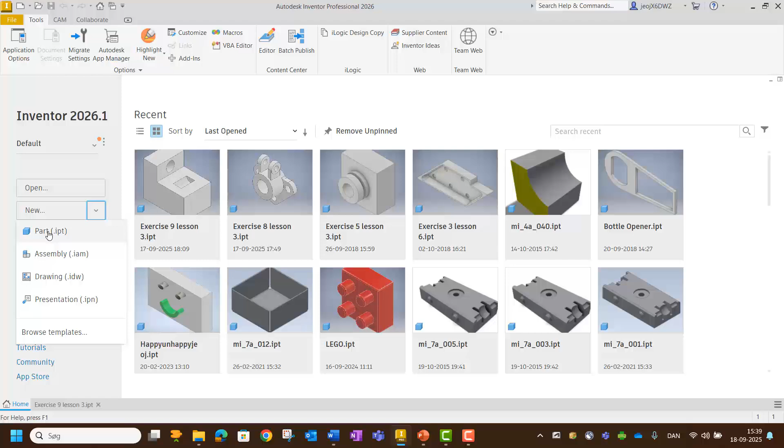So let's have a look. I'll start a new part. It's already done here, but I think I'll do it from scratch here, showing up with my empty paper.

I think we have a 0 point here, and I think I will have my 0 point here. So I basically start from here. Yes, let's have a look.

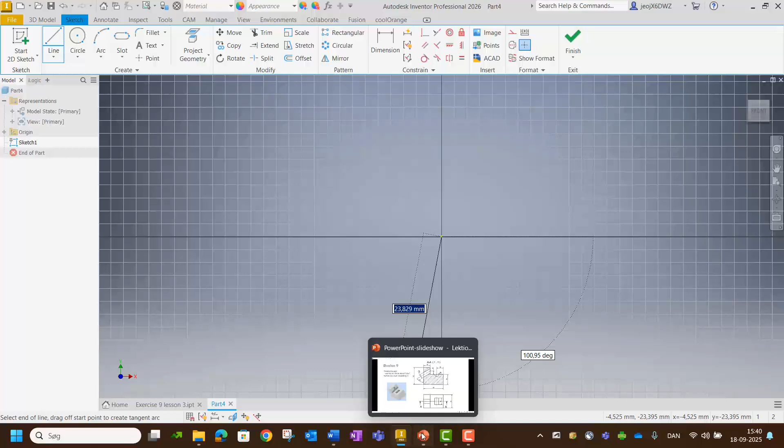I'll simply do it with lines up here, and this one was - I tend to forget - but 50 and 20. So I'll simply do this 50, I'll write it straight away, and then carry on here. And this was 20.

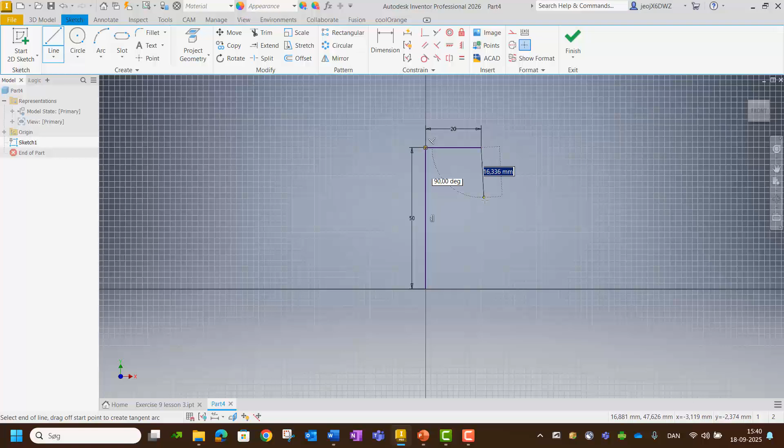Yes, and then carry on with the last part of it, this last geometry here.

Of course, we need a couple of dimensions, and I will have a look again: 30 here, the cutout, and 60 long. So let's add them.

60 here, and this was 30. When you add dimensions like that, be careful not to choose points if it's not needed and necessary.

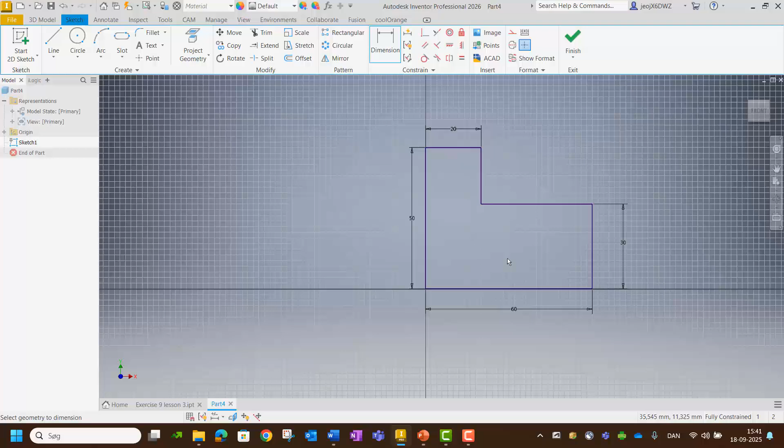But here we go. It's the first sketch for the basic feature here, and I guess this should be okay.

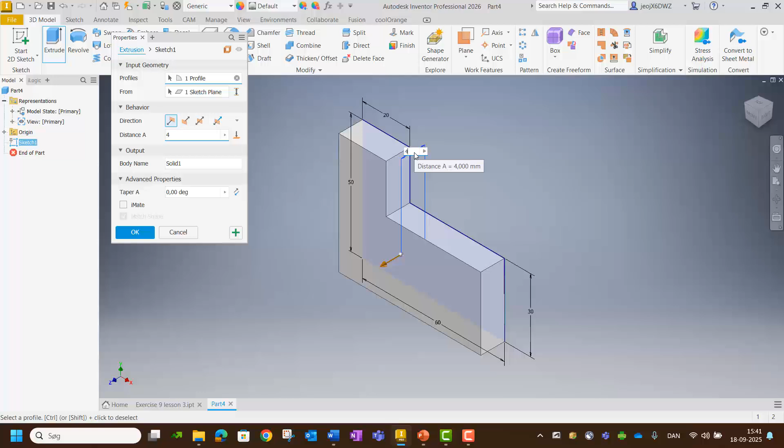So I'll finish my sketch, make an extrusion, and again I will go back. It was 40 wide, so I'll simply write 40. It's blue here, so I can write it straight away.

Here we have some symmetry. I guess we have the cutout here, and we have a hole later added. So I think I'll use the symmetry option here for my basic feature. So here we go.

First part, or first feature. So next thing I guess I'll do is the small cutout here, exactly symmetric about the center, and 20 wide, and R6 in radius. So I hope that should be straightforward.

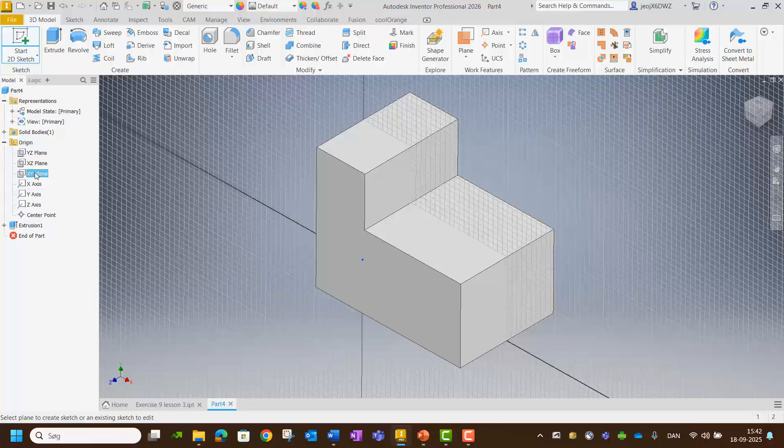So I'll simply start a new sketch, and I guess the easiest thing here to do is sketching it on the center plane here. X, Y, move in to the center of it. Yeah, exactly in the center.

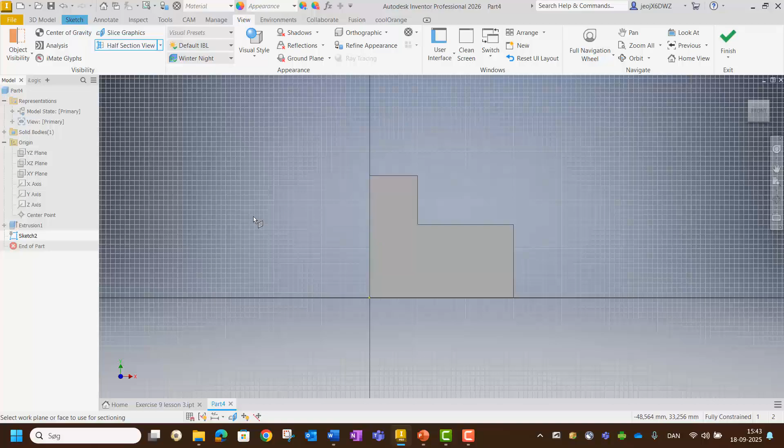Then we have a trick here. I will basically now make a half section here. It can be done by choosing this XY plane, or I can simply press F7. So I can find it here somewhere. Yeah, it's F7, and then it's actually sectioned it here, like that.

So I can see what I'm doing. Okay, back to the sketch. I will simply make a circle here, and I'll leave it the center on the top because it's a half circle, and it should be.

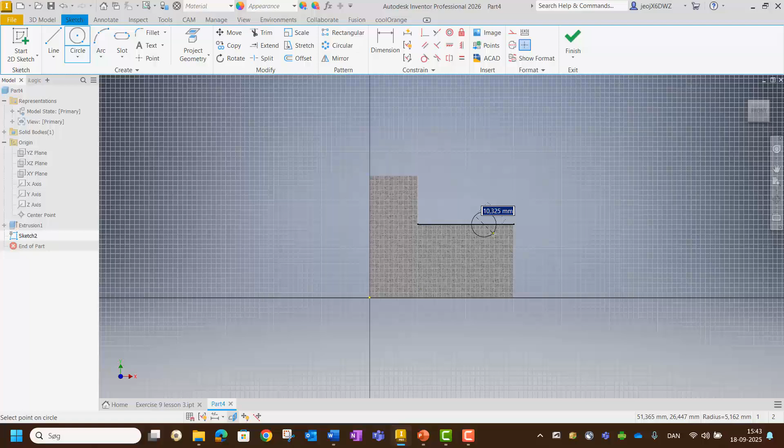12. I can actually leave it without, just to show you what to do. I'll leave it without the dimension here. Of course, when you add the dimension here, that'll be needed. I need the diameter of it here.

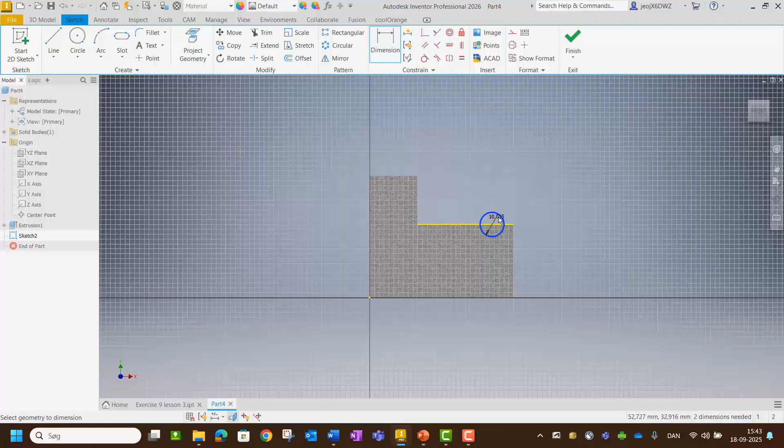And then I can actually here now choose to make it as a radius, because it's a half circle. So I can change it to a radius. Doesn't really matter, but a basic rule we can say is that...

I'll move it in here. It's flying out here, so I can for now move it. It hasn't constrained it. But the basic rule is when you're having something open, an arc or something, then we normally use radius.

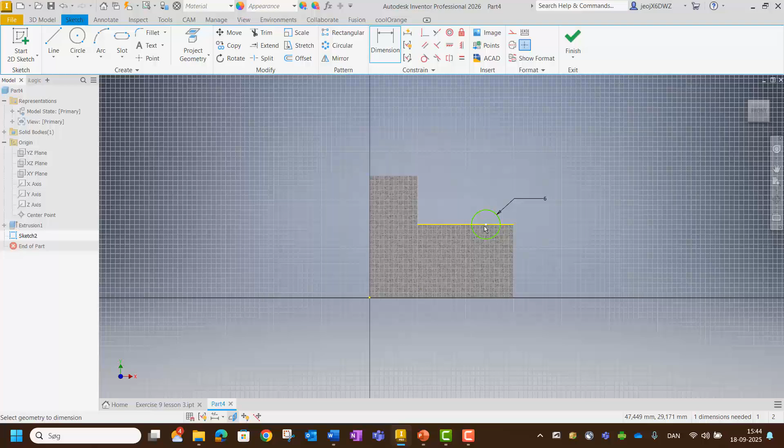When it's a closed circle, then it's normally a diameter symbol we are using. It is actually a cylinder, a closed circle here, but since it is halved here, then I've chosen to dimension as a radius. Not important, really. We have a distance here of 20, from the center to this edge.

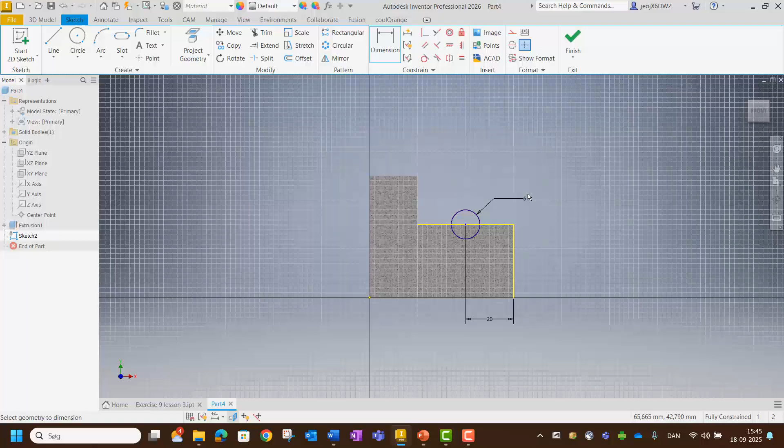Notice this edge here is now turning yellow, same as this one up here. It's because it's automatically projecting from existing geometry to our sketch. But it's fully constrained.

Exactly in the center. And then I can do an extrusion. And here I want to cut like that, to both sides, the symmetry one, yeah. And then I'll choose what to cut.

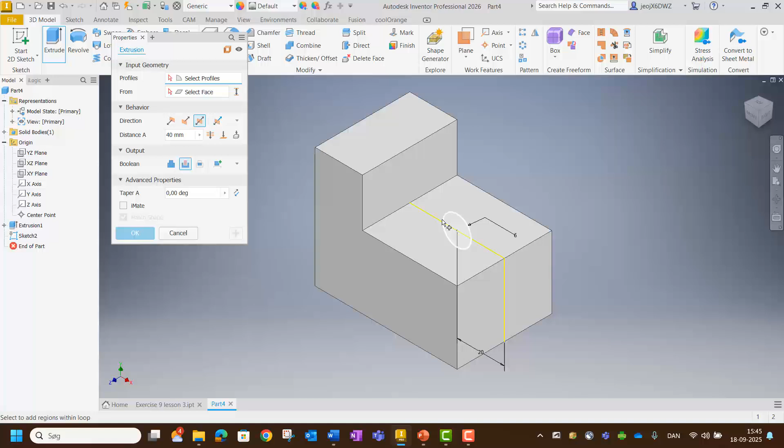Here you can see I can actually choose half of it or the other half or both. I can pick twice. If I click on the edge, then I actually click all of the circle like that. It's a cut function, but it's not 40 here, it is actually 20. Something like that. Okay, here we go.

Two features so far. So the next one is slightly more complicated. You can see because we need a hole here at a distance of 10, center of a distance from 10 from this edge here. That can be done in, I guess, several ways.

The way I've been doing it is actually creating a plane here. Then I have a line. I can turn a new plane around. That's what I have chosen. So let's see if I can actually do it.

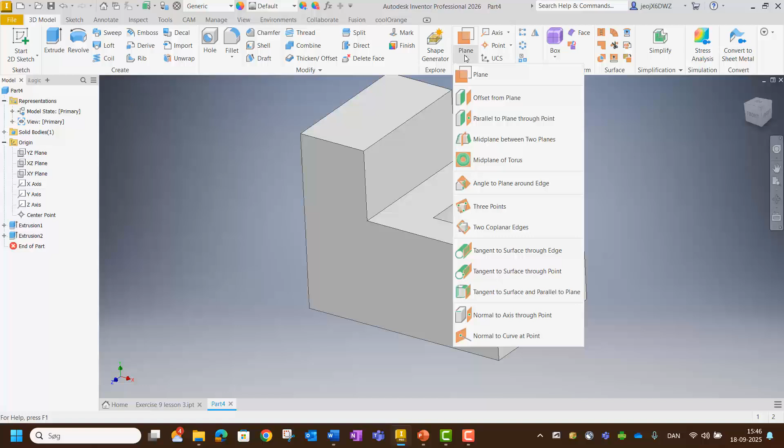So I move into the work plane, offset from plane from this one, and here we have the thin, and we have a nice work plane here. Edit. Then I want an axis.

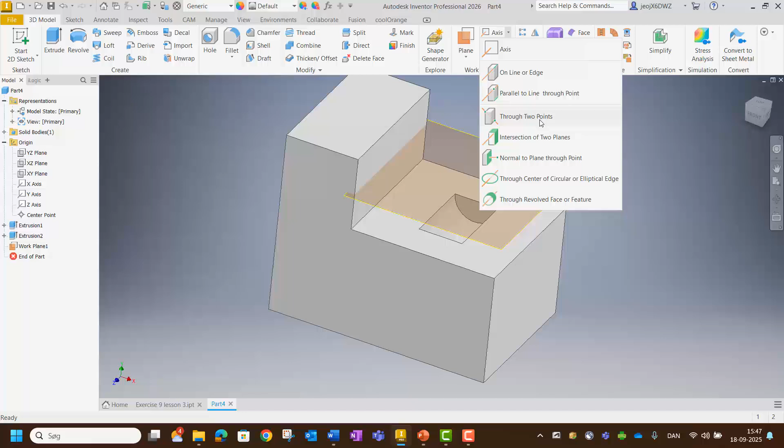I can actually create another plane around. I'm looking at using angle to plane around an edge. To get an edge, I will create this axis through not 2 points, but intersection of 2 planes here could make sense.

So let's try that one. So the plane I just created, and then this surface here. Then we have an axis.

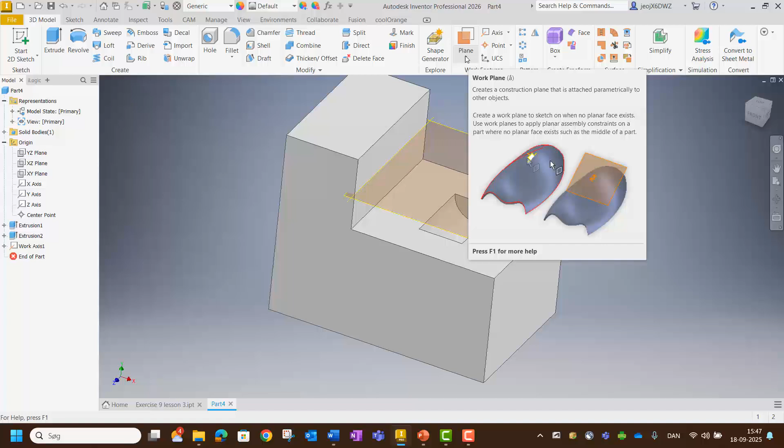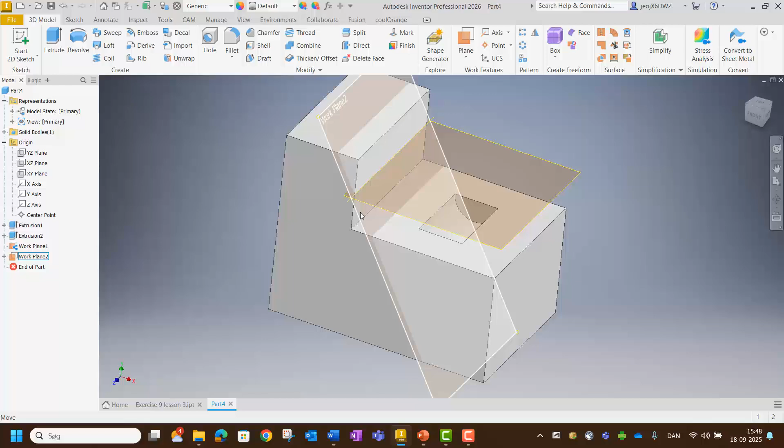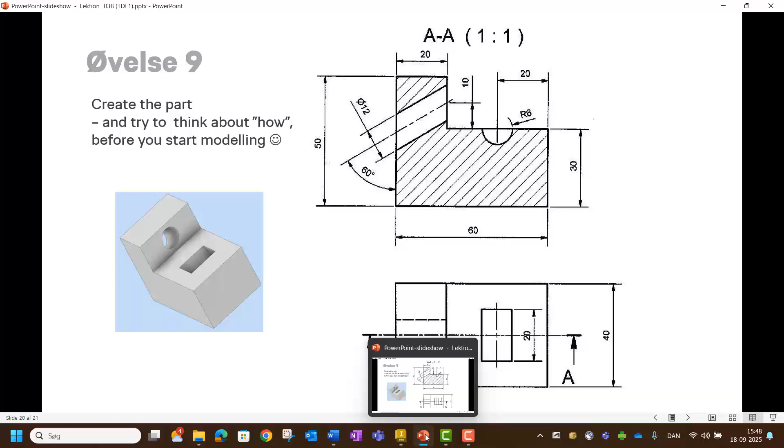And then the plane now I actually want to sketch on, choose another one here. Where are we? The one I just showed you, angle to plane around edge. So edge, this one, and the plane could be that one, and I think that should be 60, like this. Let me go back again here to ensure this is 60 here. So this should be okay, or we can change it later.

So now I have my sketching plane. I'll now start a 2D sketch on this plane, nicely moving into it, and I want a hole of 12 in that direction.

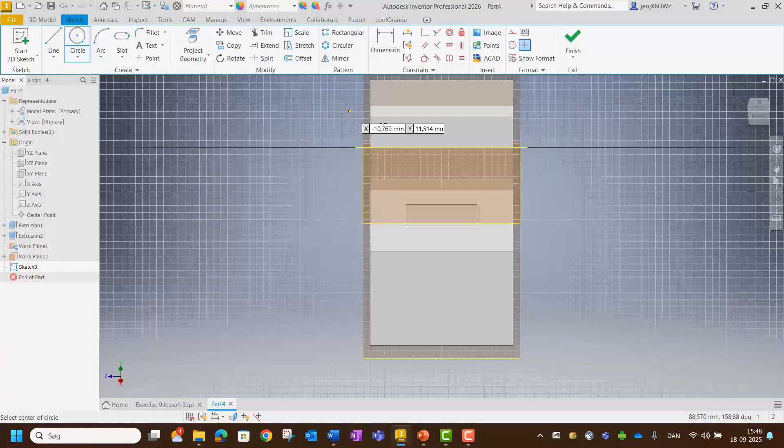So let's see if I can manage to do that. Create a circle here, just a random place, but it should be 12. And I would like to add that to my line, or make it coincident with my line.

So find the center of it, make it coincident with my line. I also want to put it into the center. And that, of course, can be done in different ways. I have my center point there, maybe I could use that one, but I might want to simply center it.

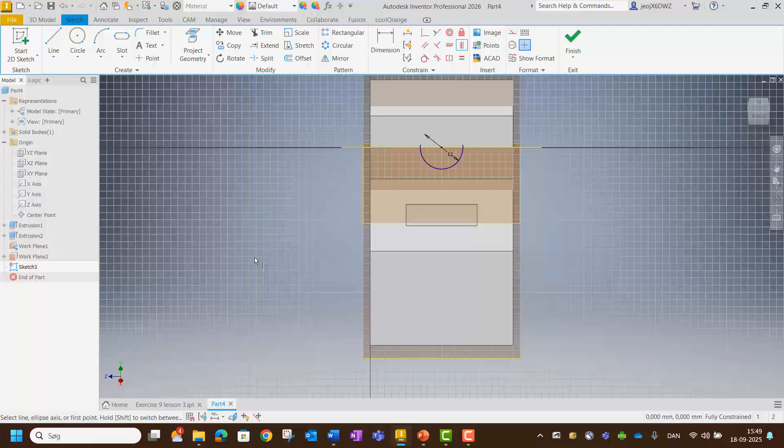So I can maybe use this vertical constraint, let's see if it works. And then the center point here, yeah, seems to be working fine. It's fully constrained, and I can now finish my sketch. See how it looks like - it looks so far okay, as expected.

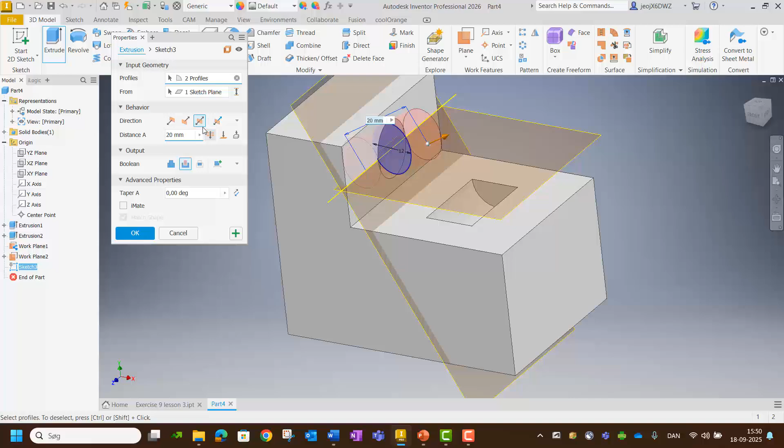And then I will create an extrusion, and again we have two halves here, you see. But I will click on the edge, and then I will pick all of it. And it's a cut I want here, so I'll use the cut function. And to both sides is okay, like that.

But not with the distance, I want to go through all of it, like that. And then, can okay it. And I think it looks pretty nice, I hope.

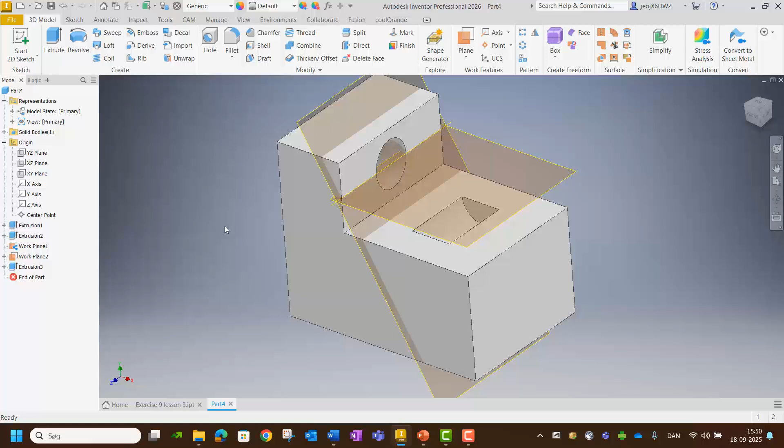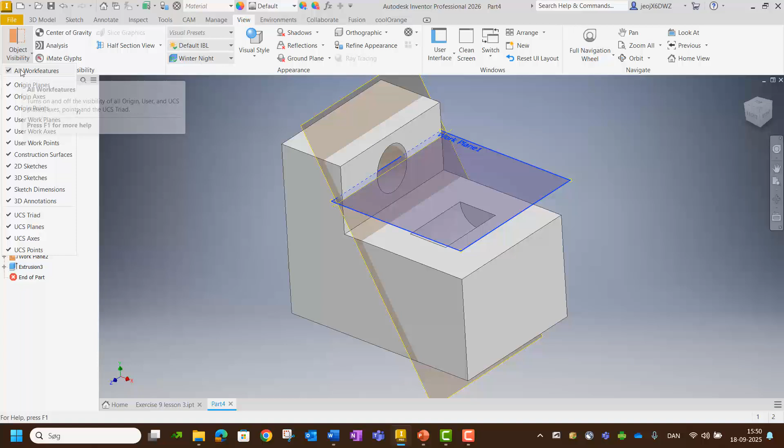And if we're fed up with all those work planes, we can make them invisible. Again, here we're taking away visibility, or if we have many of those work features, we can move into the object visibility in the view area here - object visibility and all work features, and then it should be gone.

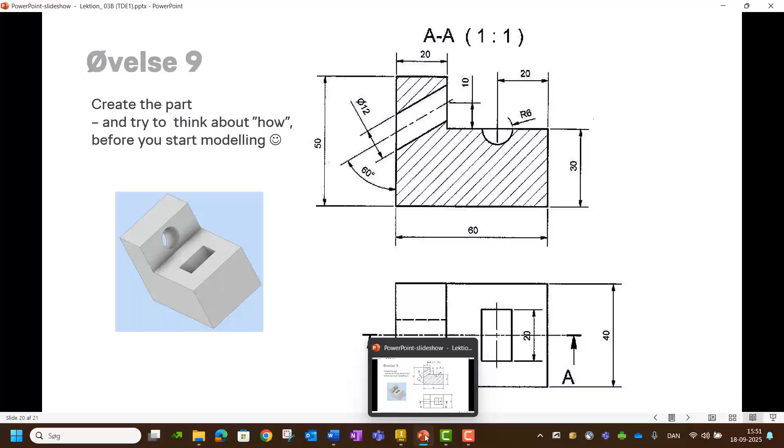And then I think with a little luck, we have the geometry as we want it. So that will conclude this video.